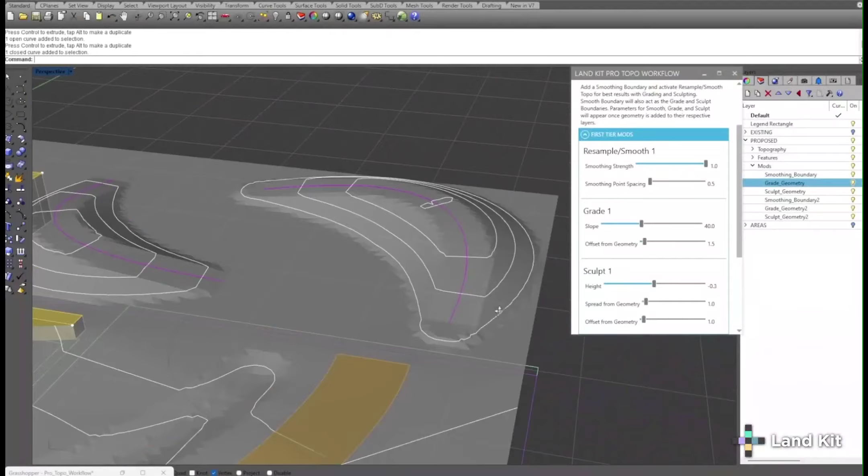It's just magical. Welcome to Kit Crashing, where we explore landscape architecture tools like 3D, parametric design, and AI.

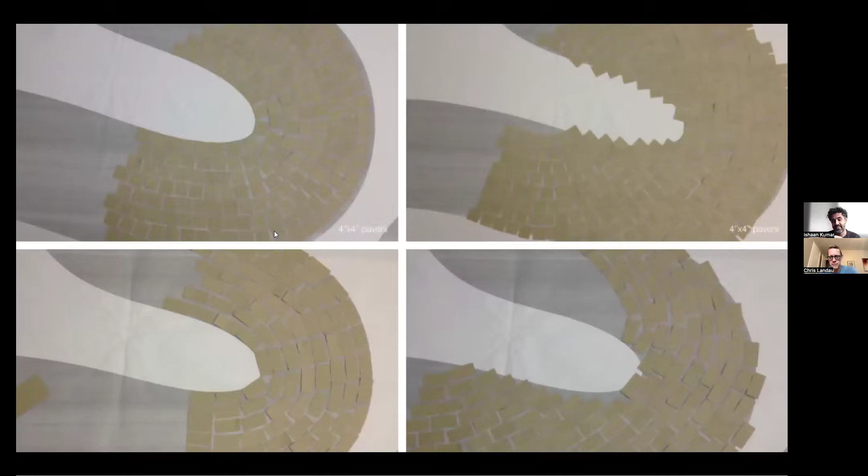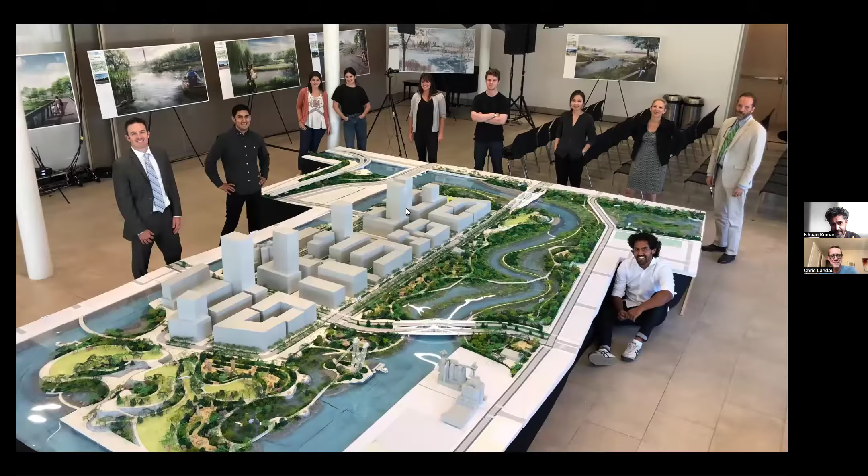iterated through models. This is another thing that I wanted to touch on: MVVA is a very physical model firm. They test out with plan, but they invest a lot of time in studying these things in large scale physical models. I actually worked at MVVA for 2 years coming out of Penn. And for one of the public meetings in Toronto on the Portlands project, we built this massive model across the whole summer. These are 30 by 40 foam core boards. I don't remember how many there were, but we worked an entire summer on them.

Another point that I wanted to talk about is just the different ways of working. MVVA is very big on the physical model, and here we're talking about the digital model. I just wanted to get your thoughts on that duality and your experience, because you're also a sculptor, from what I understand, an artist. Yeah, I have an art background and originally thought I was going to go into sculpture, and started realizing there were all these different things I could do.

I got into 3D modeling, but I did a lot of physical models when I was at Olin. I would spearhead building models. We did some really fun models and some really difficult models, like the Metropolitan Museum of Art Plaza, where we hired a really serious fabricator to work on it. It's amazing what a model can do and communicate to a client.

And for a design team, if it's a working model, LandKit definitely has that spirit. It is a digital model, but in a space like Revit everything is so constrained technically. There's always going to be technical limitations within a digital space, but being able to be fluid and iterative, to have some of the advantages of a physical model by building it as a 3D model and looking at it from different angles, but not treating it as so precious.

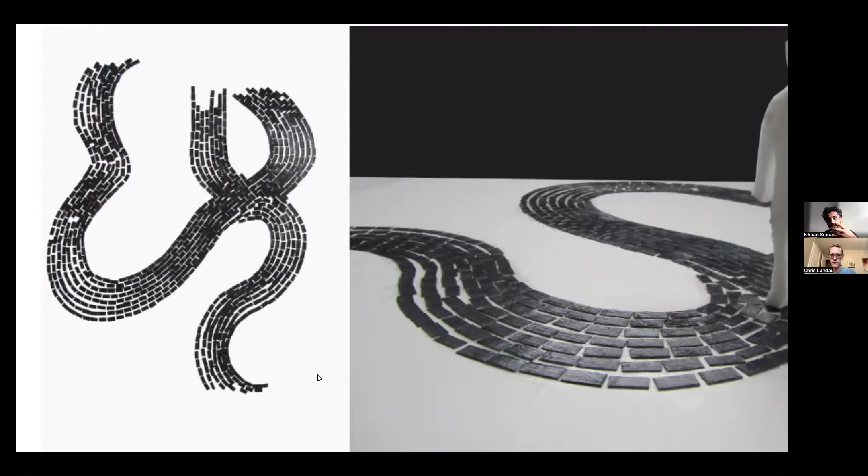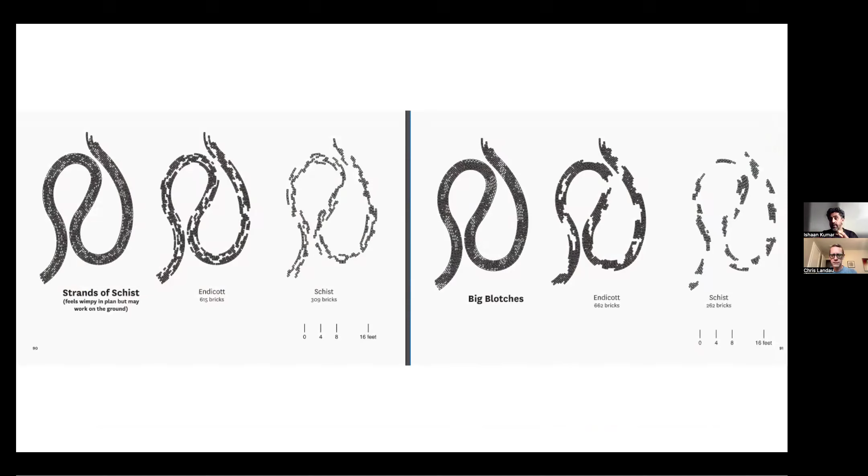There's actually a story in the book about a summer intern that took this tapestry that was in the Isabella Stewart Gardner Museum and pulled it out, and this became an inspiration because initially it was just one unit and they had tested the scale, which we could do in LandKit. You could iterate whether it's a running bond or a herringbone pattern, but that led the team to think about this dual tone and how we could recreate that using LandKit. But the process was to take this idea and mock it up on site.

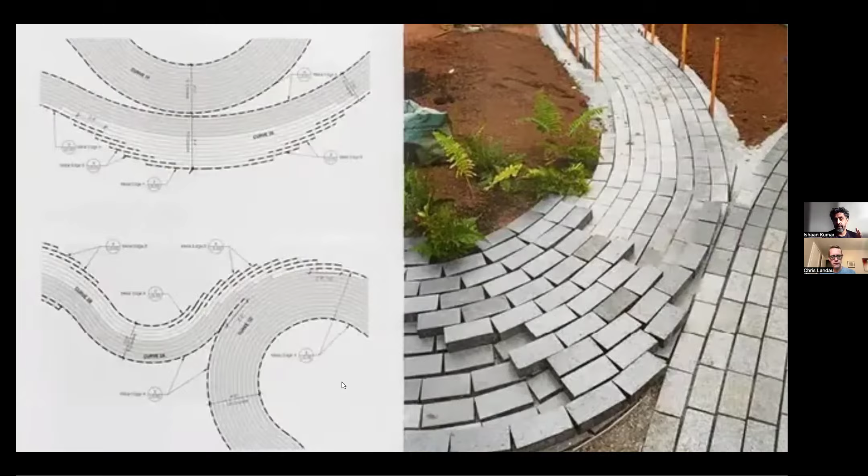Again, going back to the time and budget on this stuff, they would mock up the condition, which then informed the CD set and the final product, which no one can deny is exquisite, but there is a lot of technicality and resolution in this project. And I just want to take a second to explain some stuff that I've learned working over there.

There's curve one, curve two. Each one of these is precise with a point of reverse curvature. All of these then get put on a table with the dimension of every single curve. The curve has a center line, which varies from 4 feet to 8 feet to 2 foot 8. Somewhere over here it gets really tight and then it flares out. There's a lot of dynamism in that walking path that they achieve. Sometimes the curves just touch. And it was a very laborious process.

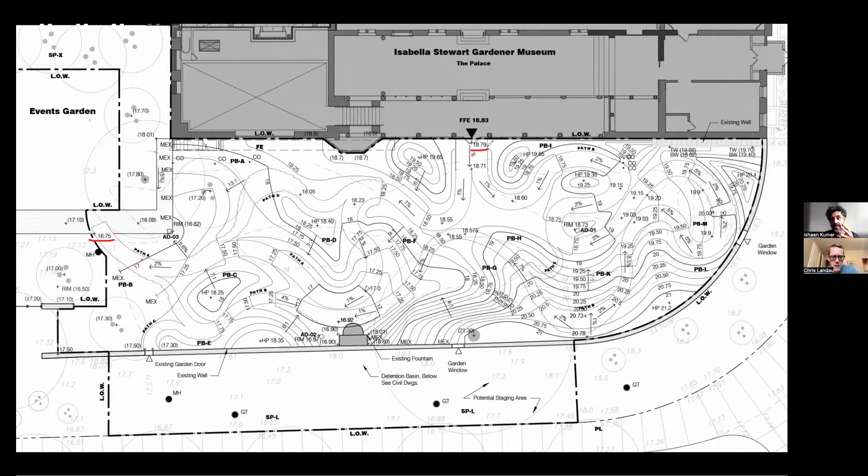And what I didn't know is that it's actually really complex grading-wise too. I thought it was flat. But actually, you come in at 16.75, and the entrance is at 18.75. So it's 2 feet higher, which if we were to take an ADA slope, we need 40 feet of run. And the thing is 50 feet wide. So not only did they achieve that, they did a bunch of operations.

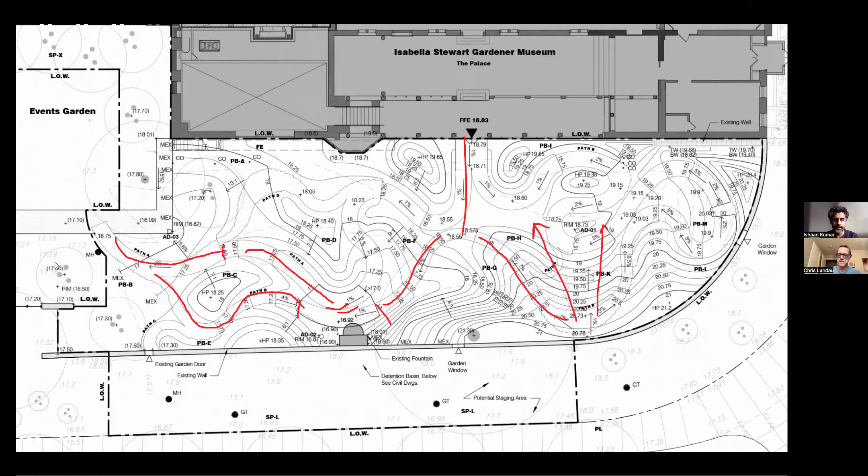Here they came up to 17.5 to go back down to meet this path that went up to come down to flatten out to this point where they touch. Then they go back up to 18, so they're at the elevation of the entryway. And then they go up even higher and have this vantage point at 20, and then you circle back down. And so there's just so much artistry in this project. Dios mío.

I have nothing to say. It's just magical, whimsical, and where I would start, just based on what I know of LandKit, is this center line.

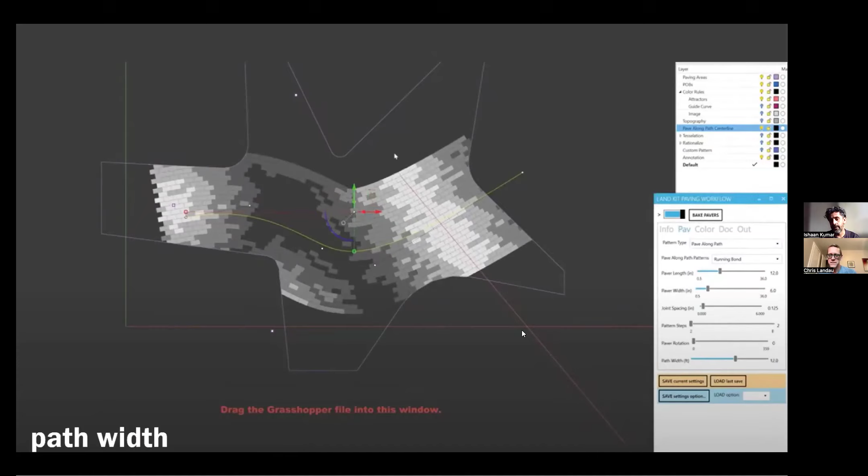Playing with that center line, the pave along path, which the workflow gives you the ability to play with the path width. This is something that Ben covers in our onboarding workshops. But last year you released the 2.1 update and you gave the flexibility to start introducing custom slopes, because nothing is designed with the one slope meets all criteria.

Yeah. And then in terms of this snake-like skin, I was thinking that maybe you could use these attractors to get that idea, but that's where I would start. And then the whole grading of this project is just another beast of its own. But we're here to see you work your magic, and I sent you the two screenshots of the paving and grading file. So maybe before we even jump into Rhino, what would your process be?

Oh my goodness. Well, I think probably the biggest place to start is the paving. It's two-dimensional. It's complicated as it is with these curves, and that's the thing where I'm like, how does this come together? I like to attack the hardest thing first, because if I fail at it, I can fall back to other things, let my brain work on it, and then come back to it. Hopefully that's not what happens.

We'll see. Maybe I'll nail it. Maybe I won't. That's part of why we call it kit crashing. But I think, yeah,

I know I say we need to design in 3D, but a paving pattern is very much a 2D thing, a two-dimensional system in many ways, and so we start there. We should define that plan, and in my case, we're going to just start with what they've designed. We're not going to start from the beginning of their process. We're just going to show how you could create something like this, and then probably show how we could tweak things, right? How could we modify those things? So that's probably how I'll start out.

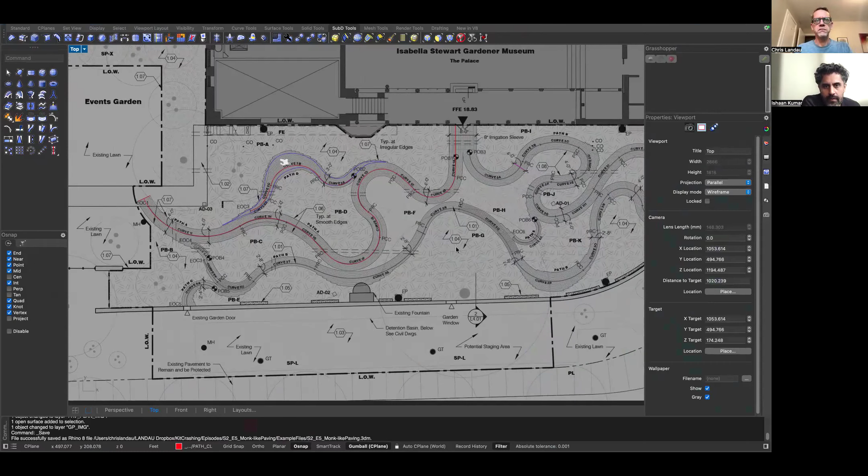So, unlike some of our other episodes, I started a little bit of setup. I just grabbed an image from online, and you sent me a little bit better image. And what I started doing was just drawing. I know I'm not drafting these perfectly, but this is the phase where we want to be able to move things really fluidly, and drafting exact poly arcs is antithetical to that. It's not important right now. So we have the main parts here. We've taken an image, brought it in relatively to scale in this case.

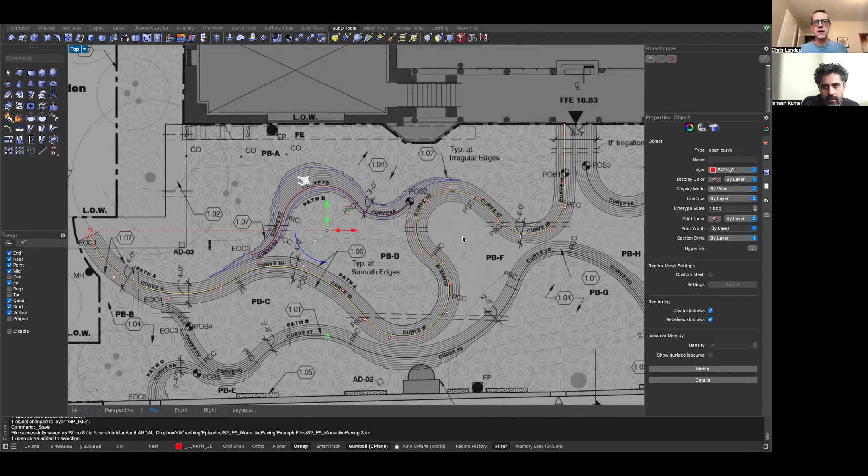We have a layer with some center line curves, and I'm still trying to wrap my head around how we're going to do this. I have this boundary curve that's going to limit where the pavers go. And I have to think through that a little bit. But I had another idea about how to do that, so I might just delete that. We'll see. So if I, hmm, I'm just trying to think.

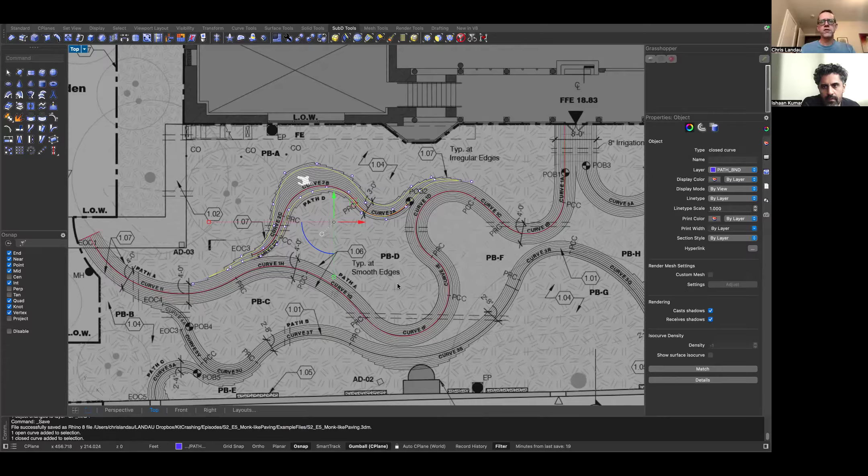It's tricky because we have two classes of path here. This path has a constant width throughout the whole path, as far as I can see. It's a center line. It's not changing in width, but honestly, it's the exception to the rule. All of the other paths are changing. So I think what we need is a boundary for every single path, this one included, even though it seems redundant. I know we could create a path procedurally with that one, but probably every single one of these is going to want a boundary.

So I'm actually going to delete this boundary, and there's a reason. But let's start here. I'm drawing on the pave path CL layer. So we'll go over to Grasshopper, and actually, I'm going to drag my Grasshopper file in so I've got the naming all right. I'm not going to use Elefront. This is kind of an old template. Delete that and delete these. Okay, hit save, save as the new Grasshopper. So we're going to do a layer called pave path CL, and then we'll do layer pipeline.

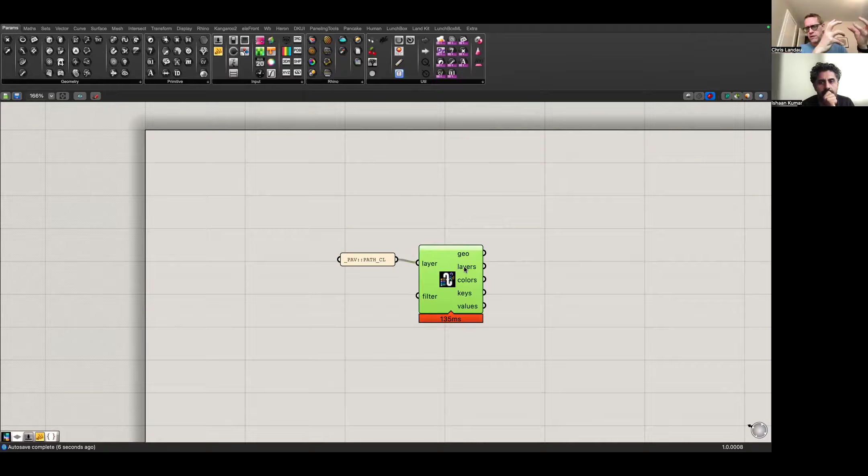We do a lot of this because I like to do this, because it brings stuff directly in from Rhino, and then that way we can work with these geometries in Rhino and they come in automatically. So asterisk was when we want everything under that heading, label, right? Okay. You want a wild card for, say, something like areas. If you're bringing in all the different areas underneath a parent layer, you'd use the asterisk as the wild card to say anything past this that has any other naming or any other text. So you can see that it's green because it's selected.

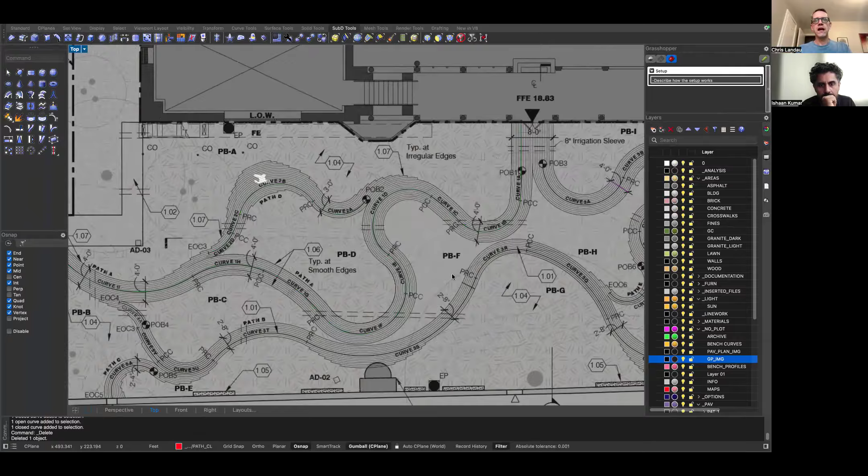And just so that we're not going back and forth like crazy people, I'm gonna combine these two windows. And then it automatically brings in all geometry, and we're only going to draw curves on this layer, but you can filter it and say just curves. So we can filter and say I only want curves. And then we're going to do pave, or sorry, path, add path pattern. So it wants one of two things. It wants either an area or a path.

So this is kind of a neat thing. If we're going to build paths like you were showing with grading, which we may need to do down the line, we may want to build this with paths and not with areas, which is kind of interesting. The only problem here is that we need it to have a custom outline, right? So we may need to separate that. If you just have a straight path going up a hill and you want to pave it, you can use the same path to pave as you are to grade, which is kind of cool. So the path kind of works for both.

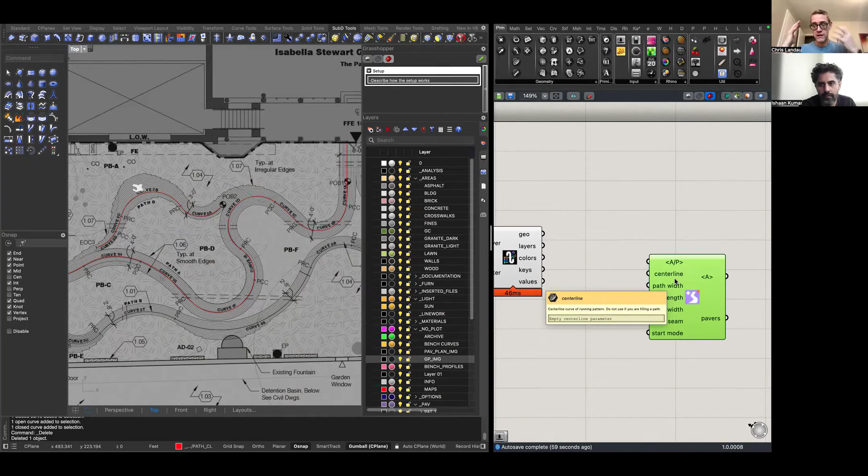But in this case, I think what we want is an area that defines a certain zone and then a center line that defines the center line. So we'll start with the center lines first. And I think it's not happy because we haven't given it boundaries. So the next thing would be to give it boundaries. So the way I'm going to do this is I know that this is a 4-foot path. I'm going to offset this 2 feet.

Could you script that though? I could if all the paths were the same, but they're not. We need these custom boundaries, and that's what I was talking about before. I'll actually delete this. I'll draw a line here. So we need custom boundaries for each one. The only one that seems like, oh, you could script that, is this one, which is okay. Like one of the simplest things you can do with,

Grasshopper is taking geometries and making simple transformations. Like, okay, I'm going to offset it this way, offset it that way, and then all those are going to get lofted. Mathematical, right. If you have multiple curves, then it gets a little bit more complicated because you have to think about the data structure. But in this case, we're going to focus on custom shapes for each center line. I see. Okay. Yeah.

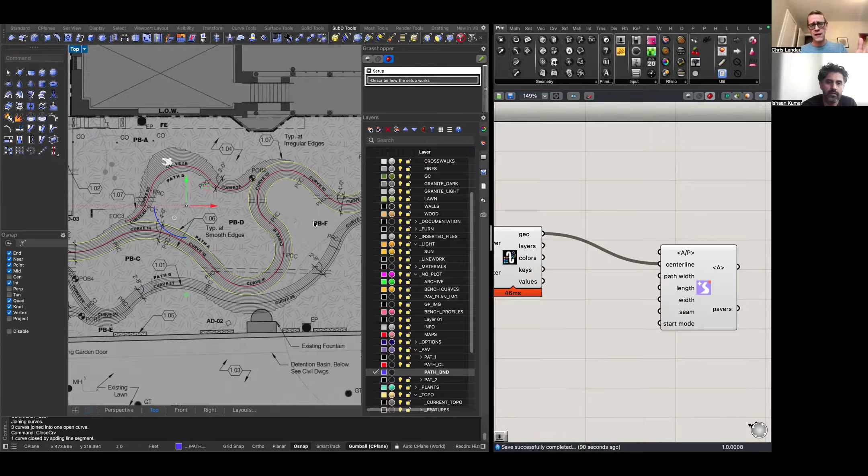And there's another thing that we're going to do, which is we're going to have to pair the boundaries with the center lines, which is a little tricky, right? Like, how do you do that? How do you make sure everything is set properly? So I'm going to grab this. I've drawn three curves. I'm going to say join, and then I'm going to say close curve, and that's a fast way to kind of get a closed boundary. Opposite end. Nice. Yeah, it's great to know how to do that for people who don't. But we're only doing it once for these paths.

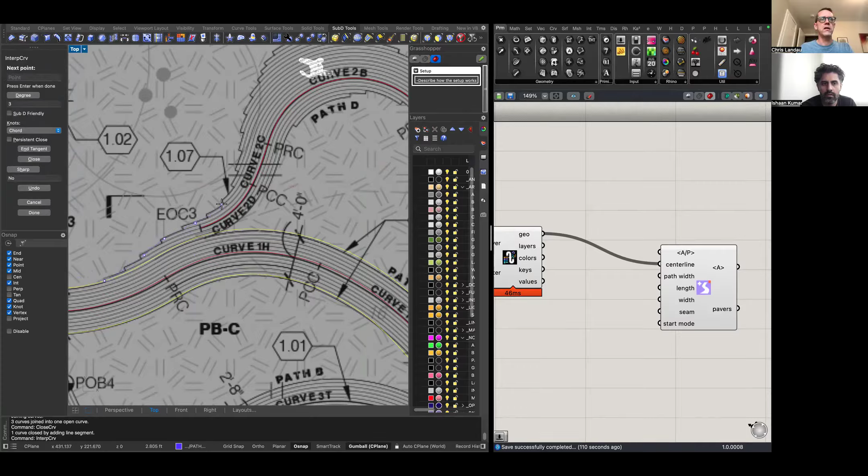So then the next thing I'm going to do, originally I thought I needed to offset this, but I have an idea. So I'm going to say interpolated curve, and I'm going to draw this right exactly along this edge, I believe. And I don't know, I'm gonna have to explore this a little bit, but for conceptual purposes, this is a great way to prototype the idea, right?

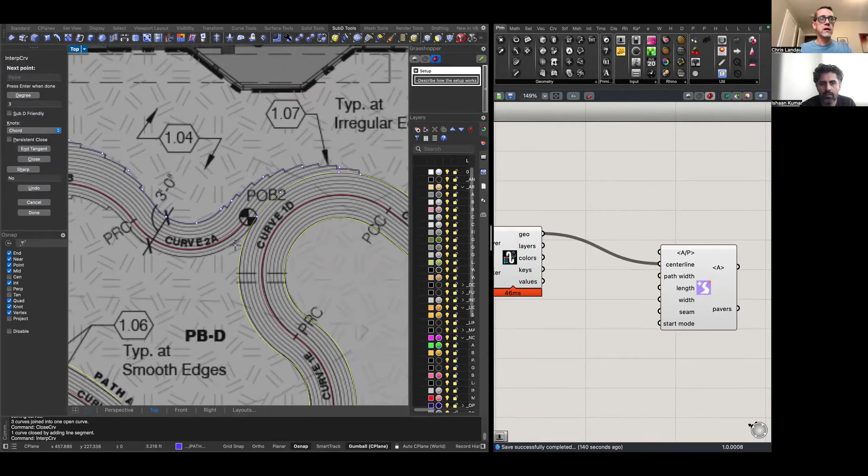Even if this doesn't reflect their construction documentation perfectly, this is going to give us a pretty good representation of the design idea. So we come around the corner here and we begin to taper down. And we can always adjust this curve as well. So then I'll follow this tightly and plug that in.

Okay. So now we have at least two boundaries, which is the main thing for setting up our Grasshopper, really just to have two boundaries. So I'll do another copy, and I like to arrange the data so the wires don't cross. It's like Ghostbusters. So then I'll do paving, and in this case it's called

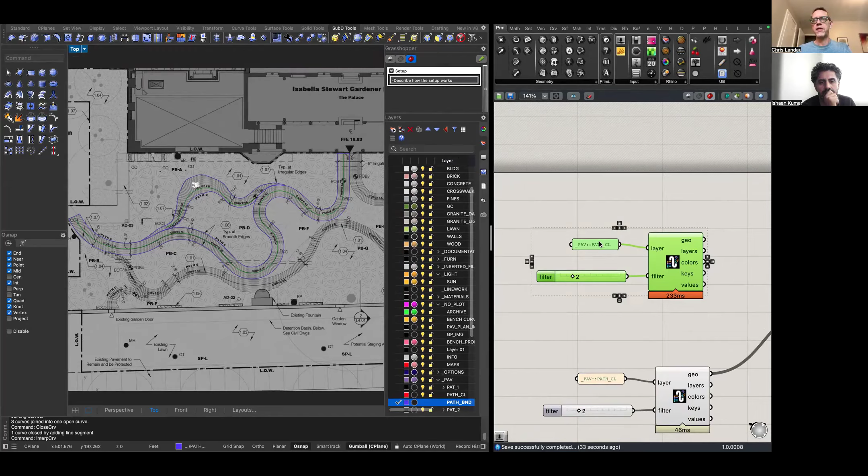Hang on, I got to get out of here to expand. It's called... a lot of layers. It's under paving bound or path bound. We're going to say path bound, and we have our boundaries, and there's two curves here.

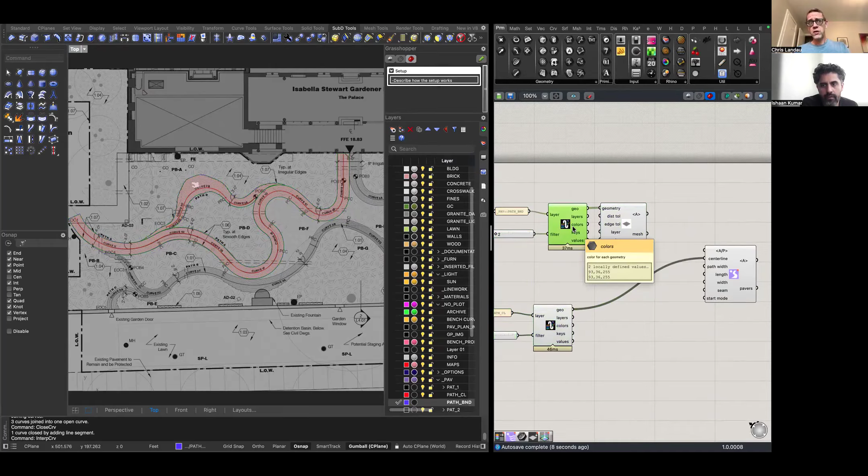So what I will do is create an area from each of these. That's what we need. But we don't know if the order of these geometries is the same as these. And we could keep going in and selecting them in order. That's one way to do it. It's kind of fussy if you don't know how to set up something in Grasshopper to solve that.

But I like to set up things that have a little bit of resiliency to them so that they automatically fall into place. Or automagically, right? So what we're going to do is say, give me the middle point along each curve. And then we're going to say, is the point in a curve? So we'll graft this data.

And grafting just means if I have a list of data, just a list of separate items, when I hover over this, I can see this list. When I graft it, each item becomes its own list, or a branch on that list. So then plug that into there, and I'll plug this into here. So P is point and C is the curve.

And I didn't graft it. I explained grafting and I didn't graft it. So we plug that in, and now that's grafted. So it shows that these are two lists with their own addresses, 000 and 001, those are the addresses. And then what we get are two branches of results saying whether or not the point appears in all of the curves.

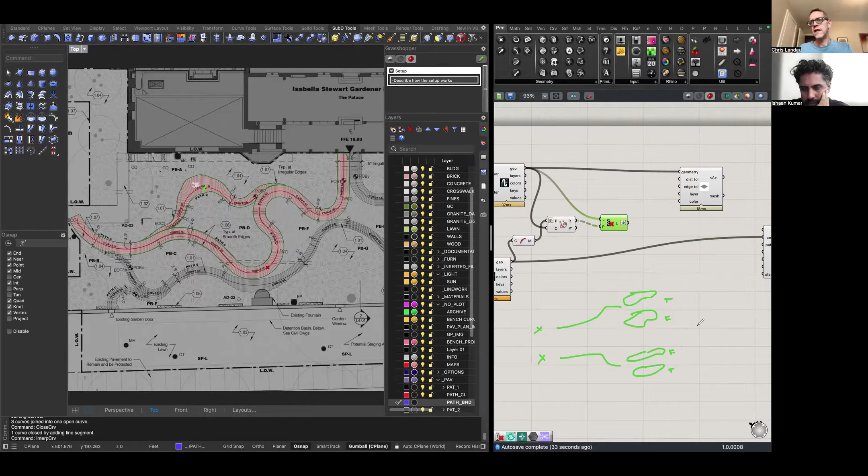So I have this point and this point, from the center line of the boundary. So these points, right? And then I test against this boundary, and then I do it again here and here. And this says, oh, it's in here, but not here. And this one says, it's not here, but it's here. Then I say, okay, zap anything that's not in, and then flatten it.

But in order to zap it, I need to say, give me the list of those, give me the true false and zap them. You use cull, it's cull by a pattern. So it's removing stuff that we don't want. And once we do that, we now have this guy and this guy, but then we need to flatten those back down so that they match the point list, right?

So now we have the boundaries that match the points. Then that should work. And then we can plug this into here. And now we have areas. And we have paving. Houston, we have paving.

Amazing. So what we want to do is look at the width of the paving. The width right now is crazy, it's 1 foot, and it looks like it's going to be 4 inches. There's a couple ways we can do that. Because these are in inches, I'm going to create a divide by 12 expression on the input.

You can do grafting here on the input. I'm going to modify what that input is and say that the width is x. It always does x divided by 12, and that turns feet into inches. Is that right? Yeah, sorry, inches into feet turns the 4 inch into a foot value.

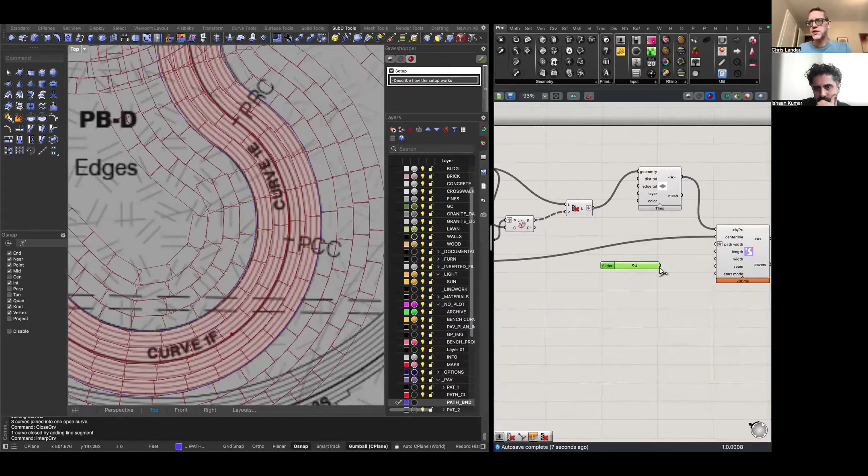So now, oh, that's path width. I want paver width. So we do x divided by 12. And the length as well. Yeah, and this is wrong. First of all, we don't want this expression, because that is going to be a number in feet.

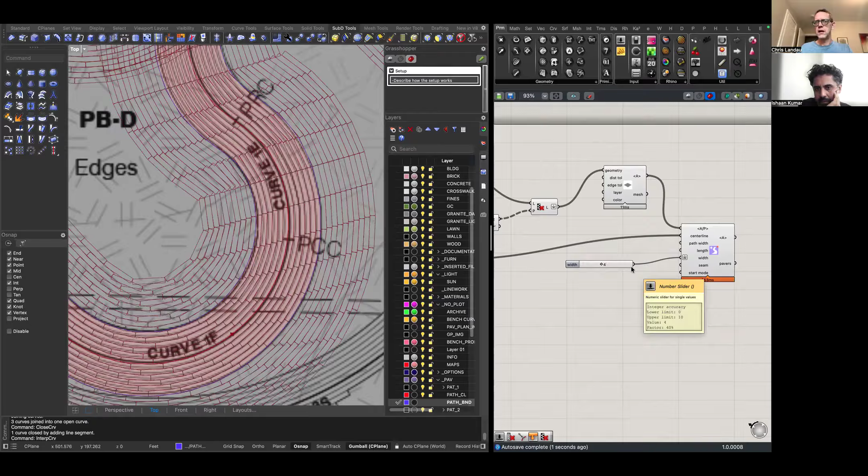Yeah, and then in order to, sorry, commit, there we go. In order to remove this, we hold the command or control key down and we just replug it and it unplugs that. Now our path width, we know that the width is 4 feet in this case. This is going to be an issue here, and we're going to address that.

Why isn't the boundary supposed to be the edge? I'll show you that in a minute.

So if we say, for the length as well, we need x divided by 12. And our length looks like, maybe it's 8 inches, right? As I go along, I like to hit save.

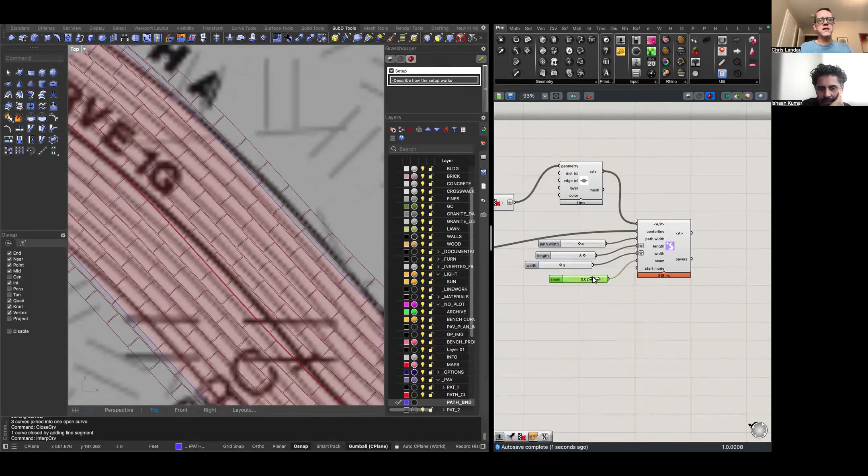So that's good, and then there's probably some kind of spacing between them as well. I'm just going to do 0.01, which is in feet, which you would never draw in CAD, but I love this already. And then we can just adjust that dynamically. You could do the expression on that as well to be x divided by 12 and do an inch value.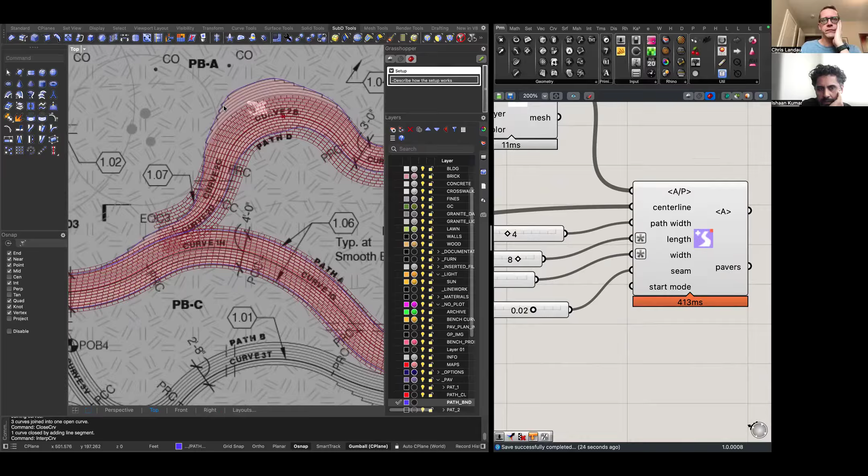So let me look at what your question was regarding the boundary. So why is it not adjusting according to the boundary, right? And part of that has to do with the fact that we are giving it an exact paver or path width. The path has a width, and different paths are going to have different widths, we know that. That's going to have to adjust.

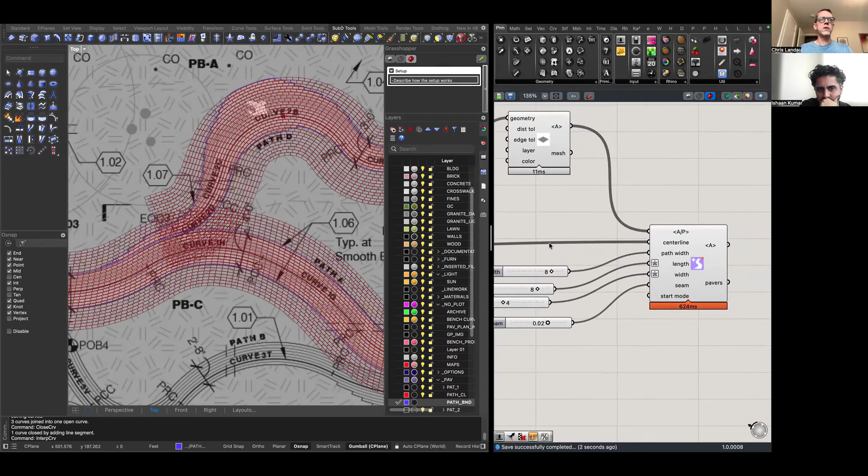So we may need to do our custom parameters possibly. Or we could say, just make it bigger, and then we'll remove pavers from that boundary.

So what we want to do is, there's a few ways to deal with this. One is to trim, right? So we could say pavers and just trim them. And it's trimming a lot of pavers, so it's kind of a slowish operation. Now we have pavers that are getting trimmed along those boundaries.

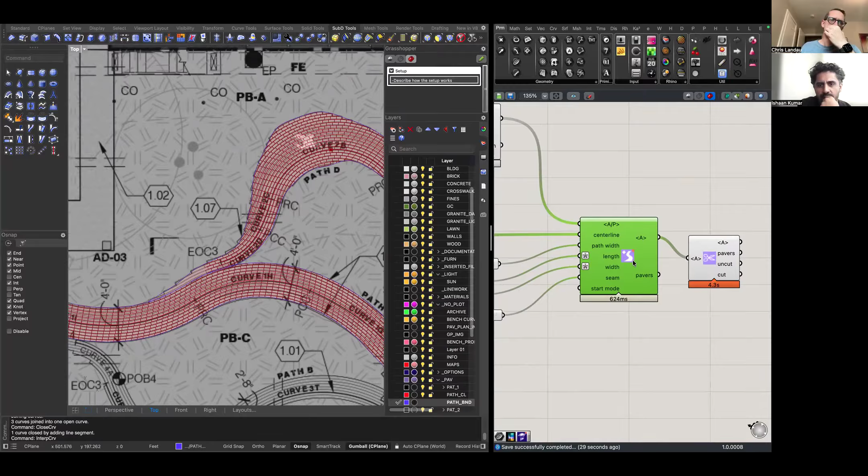It's a little hard to see. The trim works, it knows based on the relationship in the script that it's tied to the boundary. No, it's based on the center line. No, it's based on the boundary. It finds and trims using the boundary to trim.

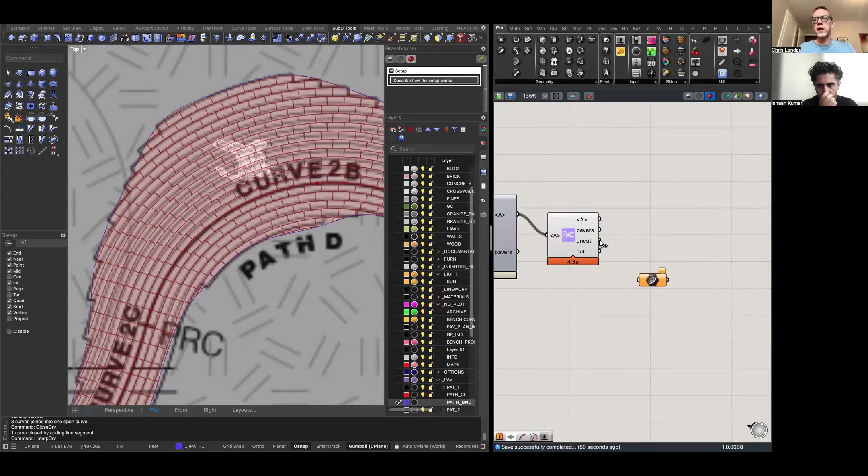But what we're going to do as a trick, as a hack, is we're going to plug in the uncut pavers, and then we'll hide this. And now, it's hard to see, so we're going to do a mesh just so we can see these and hide this other stuff. There's a lot of stuff going on here. And then we will plug this into maybe some kind of a preview bake plus.

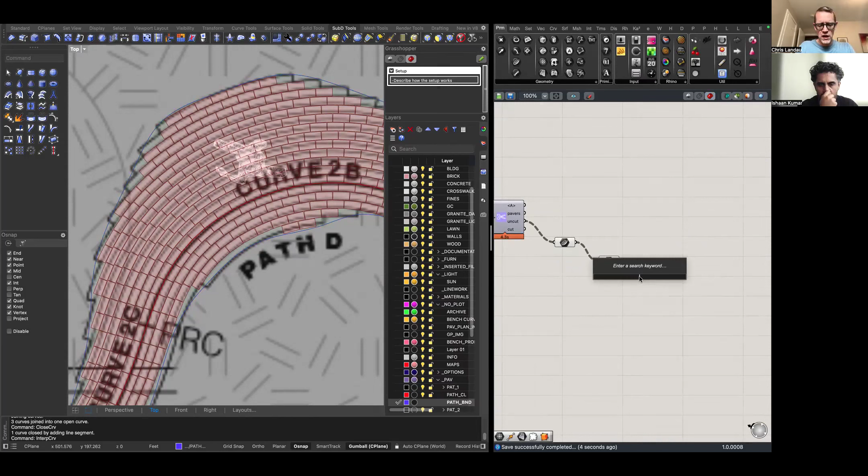And then we will make this, that's close enough for now. So now you can see it's getting much closer to what we need, right? It's only including pavers that are not trimmed. There's definitely some issues with our width, right?

So if you have a 4 inch wide paver with a gap, and then you have a width of the path which only accounts for four feet, it's not really going to fit, right? This is the kind of thing that typically you wouldn't discover until you're in the field, with the contractor like this doesn't make sense. That's why you do those tests.

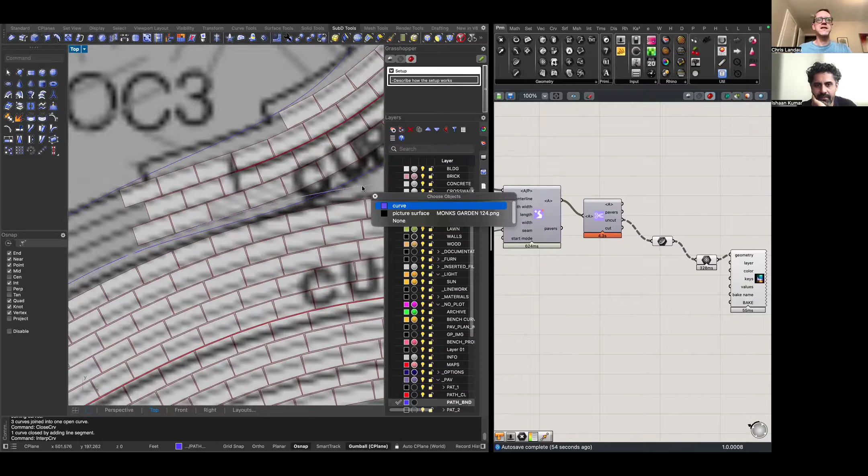But in our case, what we could do is just say we should have made this offset bigger, and we can actually just do that. We can say okay, my seam is going to be 0.02. We can say offset... let's just say 0.08, because of the gap.

And then I'll delete this old one. It's probably not going to be happy. It's going to have to retrim. But yeah, that should do it.

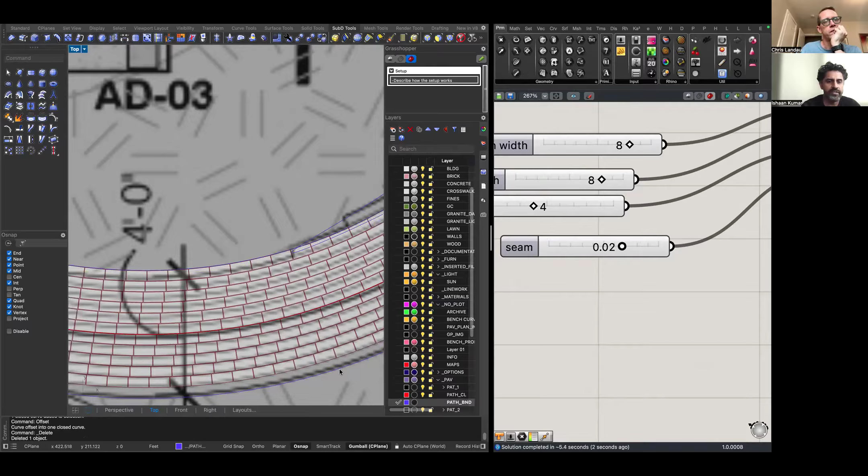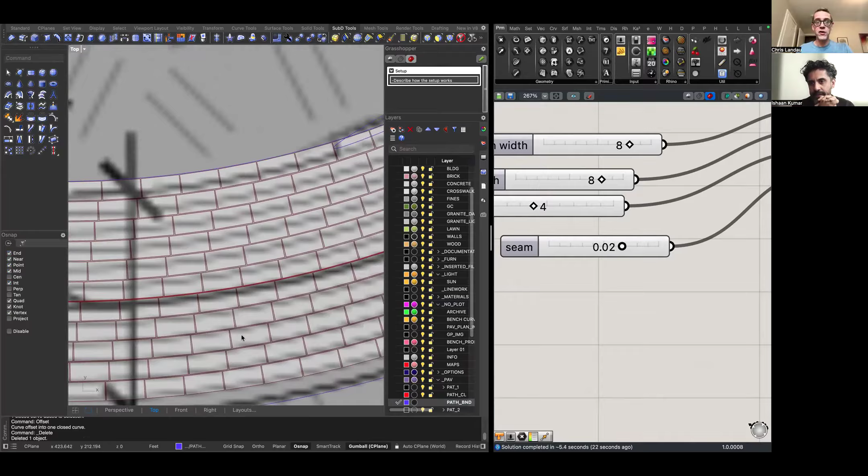While we wait, what I was getting at is the trim component in Grasshopper doesn't need the boundary curve - it recognizes it from the step behind. You put in the trim component and you didn't plug in the boundary, because the boundary's already inherent in there. It takes the logic, it says whatever the boundary was, use that. So one less wire.

So we're already kind of starting to get there. I can extend this out to here. I know this is not following the curve properly, but we can begin to see that - just as a conceptual thing, this is probably a little undesirable in terms of the process, I would say.

There's also something about the way - I'm just noticing, did I draw 2 points? I think I drew two points. That's funny.

And just flagging that we're dealing with a lot of geometry here that's being drawn and modeled, which is why it's starting to slow down and bog. But it gives you the pros of visualizing this in real time and controlling the gap, iterating the curve. It has its pros, obviously.

So one of the things you'll see, if we look here at the preview - can you see how it's simplifying that curve a little bit? See how the green doesn't quite meet the purple curve? That's because when you create a mesh, you can set your own tolerances. So we have a distance tolerance of 0.01 feet and an edge tolerance of 5 feet. If we wanted to tighten that up, we could do 2 feet.

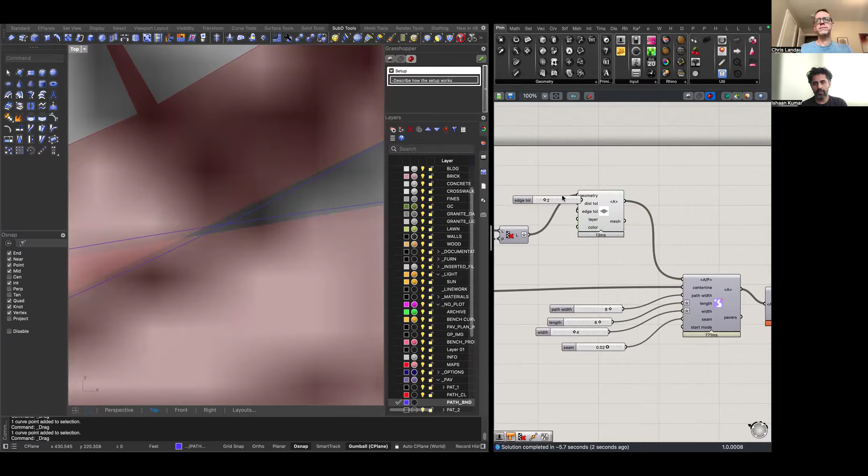And it's just going to be a lot tighter, and it might actually - so what was happening is that shift seemed to be cutting off some of those pavers. That's interesting, it's still doing it. We may just want to offset this a little bit more.

Because you don't want to make this too detailed, then it can start to be a little bit heavy. We don't want it to be too heavy - it's this kind of back and forth. You want to be able to iterate and all of that fun stuff. So let's take that curve - we're still on the path boundary. We'll offset it, offset another point.

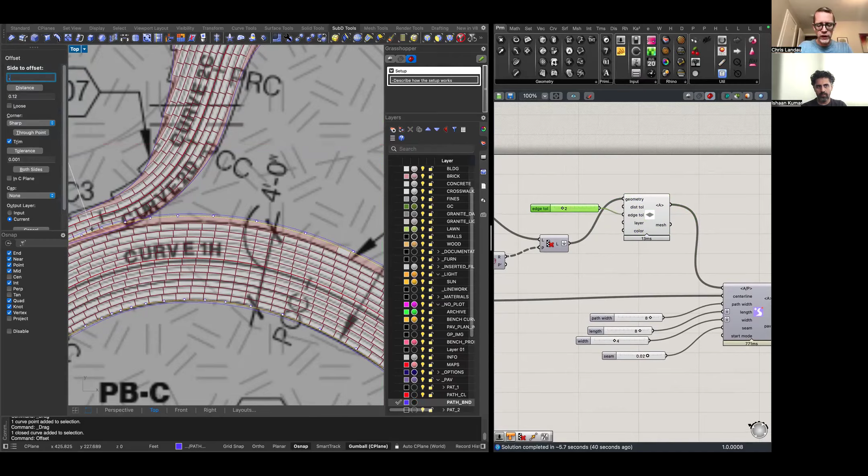An inch, 0.04 or something like that. We have to click to offset it, and then we can delete the old curve. The way it's working, it's processing both changes - once we make the offset, because it's in the layer pipeline, it pulls that in, and then when we delete it, it processes again. That's why the wheel is spinning there.

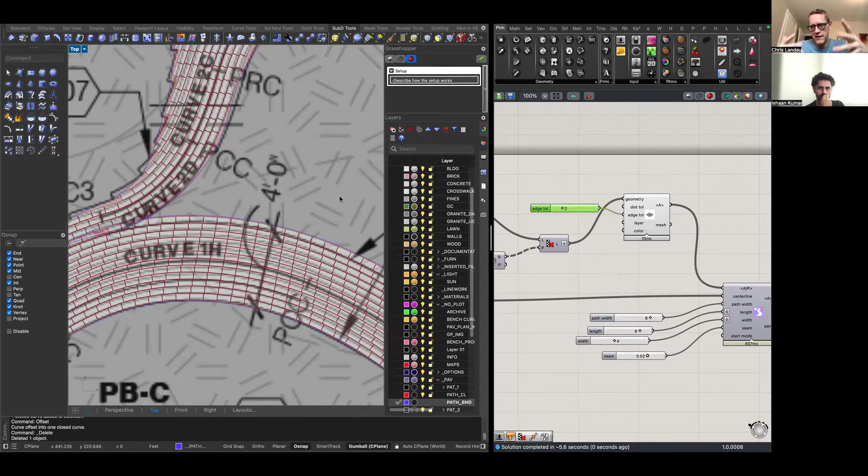But you can see that we have a pretty great approach to this in terms of how we can begin to iterate. We can take this and say, take all these points and maybe we're moving those - maybe we have a sketch that the boss drew and we're just trying to match the sketch, right? We're trying to get it as close to what the boss said as possible, and we'll move that curve up and it starts to fill in those gaps that we're missing.

We grab this and say, yeah, this is actually a lot of points, and the reason it does that is from the offset. So what we could do is say simplify curve, and sometimes that will do it. It doesn't seem to be doing it in this case, but what we can do is just fix little things like that if we needed to. I don't know if that's going to do it... yeah, it did it. In this case, it did it nicely.

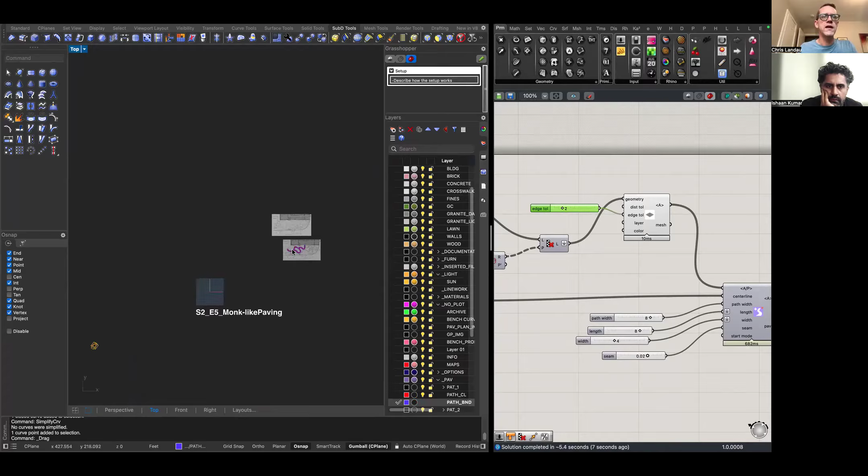So pretty good - maybe, if we look at this, it's not construction doc level, but we did this in 20 minutes.

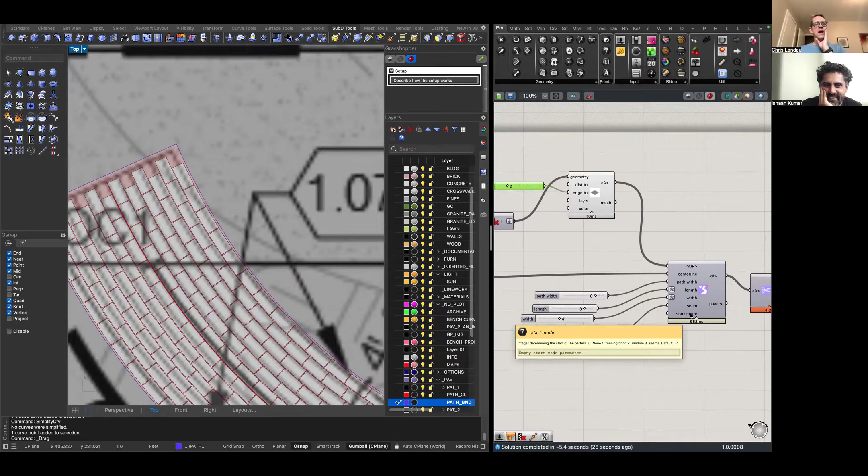The other thing to look at here is the way that the pattern starts - this is just a little side thing. There's a start mode, so it starts with a running bond. Ironically, once we get to here, you see everything is sort of stacked up and aligned, right? And that might be undesirable, and in some cases unavoidable - it's just, when you're shifting the width, it's going to change, and things are going to line up.

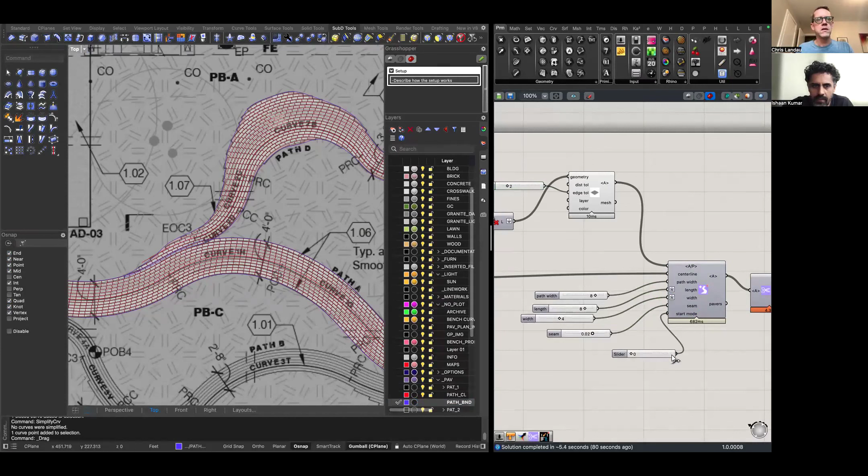For these start modes, you can do none - what is none? I forget what none is. Why would there be none? Running bond, random, and seams - oh, these are modes. So random, let me see. So none, let's just try it. Zero is... oh, none means it starts with no running bond - it's like everything is lined up perfectly.

Aligned, yeah, okay. And then we saw running bond, and then the next one is random. So we start there, and you can see that what it will do is randomize the starting positions of each row. And that might, in the grand scheme of things, even though certain things line up a little bit more, not be like this thing where you're like, why are all of those lined up? It's conspicuous, right, and when you're doing this visual design, sometimes you don't want that.

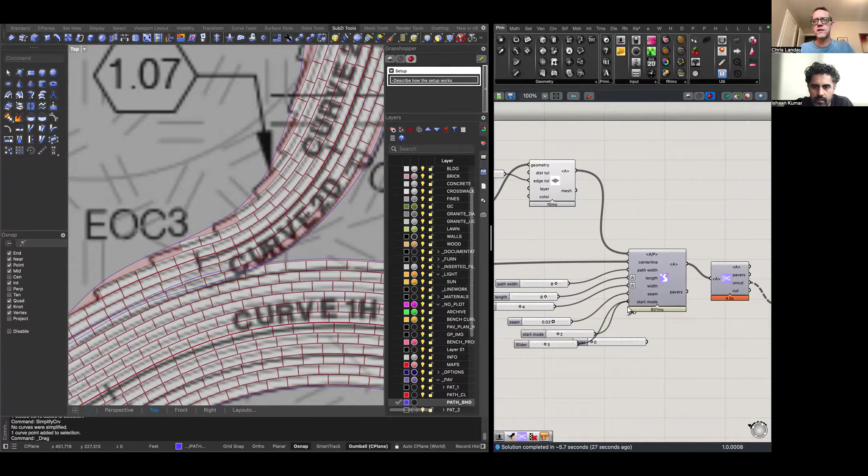That's really important. And then the other mode, since we're here and doing it, is three, which does kind of a... what is it doing? Seams, I forget. I feel like seams needs a path, and seams will actually turn it into kind of like a boardwalk - like an edging condition almost. So let's just call it quits on this little element here.

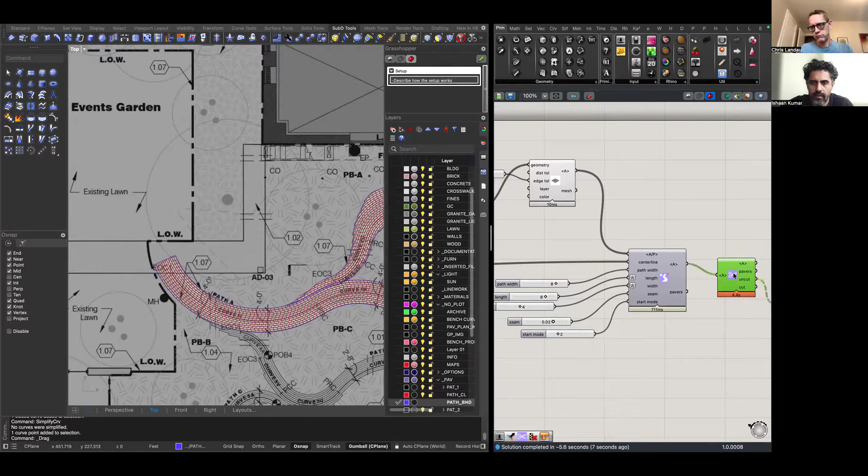Two is running bond, right? Yeah. And so you can see that we have an expensive component in terms of processing. The way that I noticed that is I'm using what's called the profiler, with the name expensive component - 4.4 seconds is expensive. And I don't mean like the cost of the software, no, no - I mean time, time is valuable.

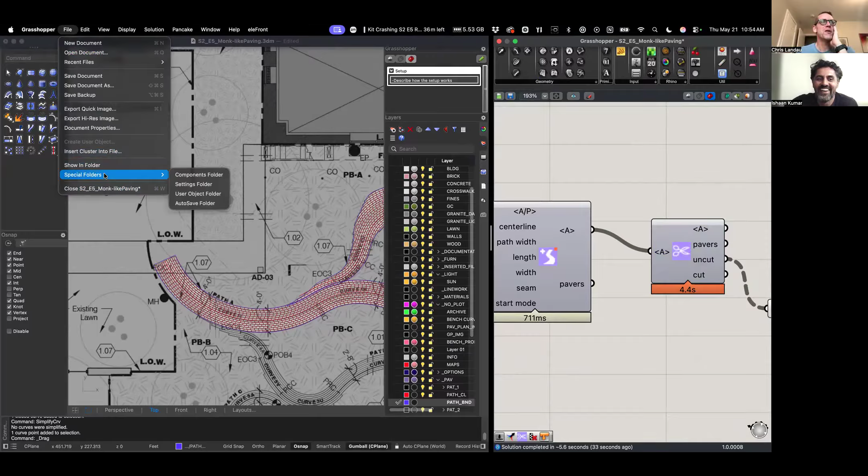So if you go to the settings - you got to be in Grasshopper - you go to the settings and say Grasshopper settings, and there's all kinds of different stuff. Some of these are actually Pancake, that's like a plugin. But under widgets, you can go down and say turn on the profiler widget, and what it does is it shows you how fast each component is running. It gives you a little color indication too, which is really nice. This is for anybody who's doing serious computational design.

This is really important because you start to see what takes a really long time, what geometric operations take a long time, like maybe where a problem is occurring because you've grafted where you should have flattened data or something like that. Yeah, and so you can see that you're multiplying.

But this is where, not to derail the conversation, but this is where the value proposition of LandKit is really in your face. It's like 711 milliseconds to create all of that, or 4 seconds, versus how long it would take to draw this, and your boss comes back and is like, I want this arc to be tighter, and you're arraying a rectangle. Yeah.

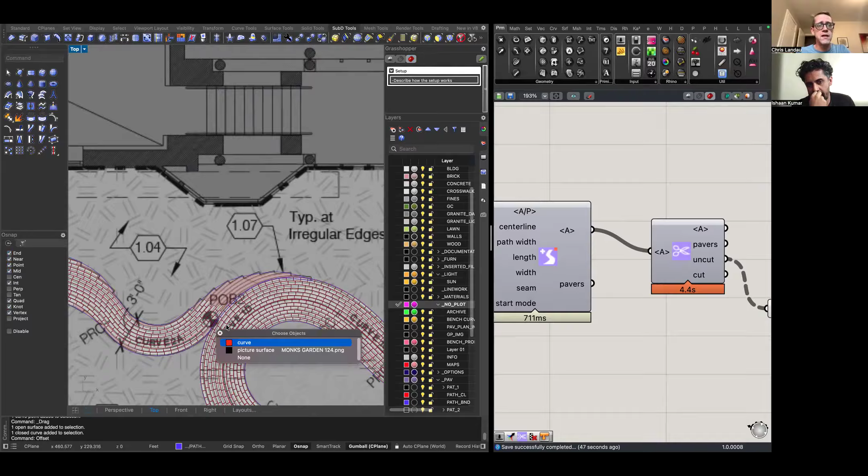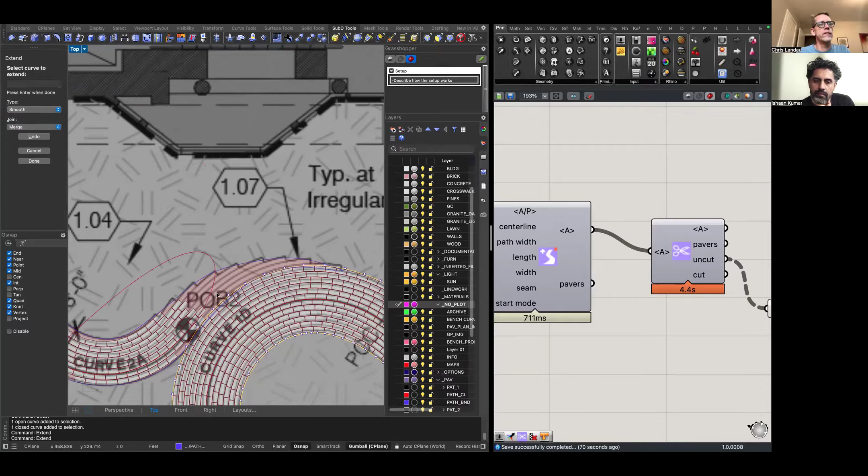Sorry, I'm just setting up this last curve. Anyway, so I can extend this curve, and maybe that's what I'll do. I'll say use this as a boundary, extend it, and do an arc. So arc is the type that I'm using. So then when I click on this, oh, it's going to follow it. Let me see if there's a different way to do this. Smooth. I thought there was a way to do this where you could actually determine how to do that.

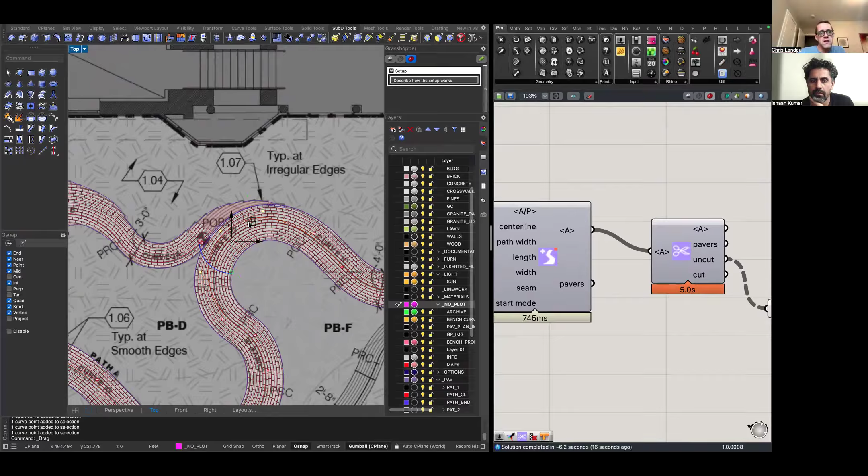But this brings up a different interesting point. If you can see what just happened there, I'm going to undo that. But some of those early studies you showed me, of how they were looking at the pattern and how it landed on the path, we could just as easily say, what if we did this thing where the pattern kind of falls off of the path, and so it begins to turn in a different way, and we get this kind of thing. And who knows, maybe they would have done something more freewheeling, with things going in and out, if they had a tool like this, right?

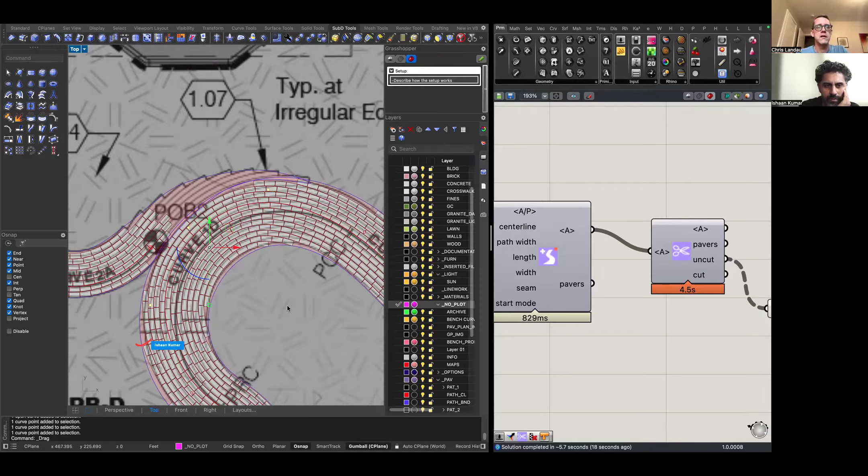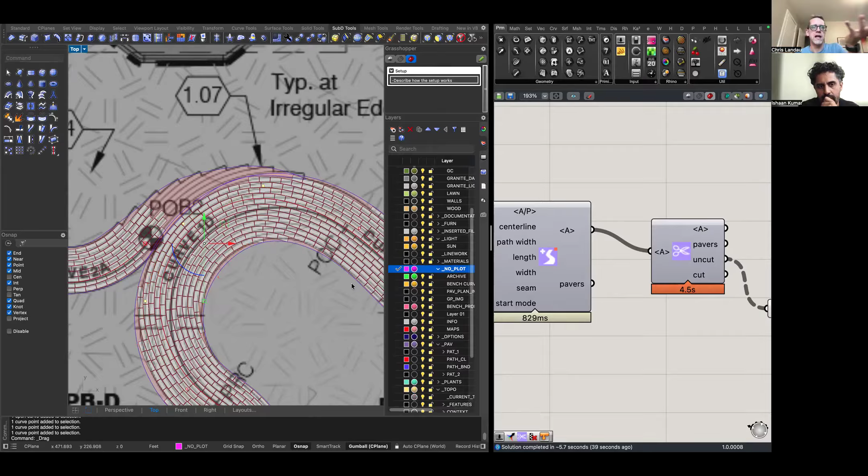Yeah, because it starts to give you that jagged edge that they ended up doing. A lot of times the decisions we make about these things have to do with constructability, but they also have to do with what can our team do in the time that we have? What's possible to document? And if the tool is literally helping you draw this thing...

We don't have to do this, but the theory is there. We could play with that boundary and move it like you did, and you would get that jagged edge here. So it's just a lot faster, because I would always think of it as the center line, but what you just did there gave us the effect that they wanted to study and iterate, which was how far does it start to peel. Those are the most beautiful moments of the project, I think, when it flares out and the edge dissipates and it's not a clean offset, this condition right here. So you just showed me a really fast way to iterate that.

So I'm going to show you something even faster here. This is all about speed. So you can see this takes 4 seconds. Every time I do something in the file, I wait 4 seconds. Doesn't seem like a long time, but when you're working and you're in the flow, it's really hard because you want to be able to edit a lot of things. So if I just lock the solver, I can then say, all right, let's draw an arc. Oops. Make sure you're in Rhino.

Let's draw an arc, and I'm going to do T for tangent, and then I'll go off of the end of this and all the way over to the end of here, and then pick that third point. I don't know where it is exactly, and then I click there, and this is not quite right. Circle TTR, I think I would use. I think that's a CAD command, isn't it? Circle TTR. I just have to look and see which curve we're on. I think it's this one.

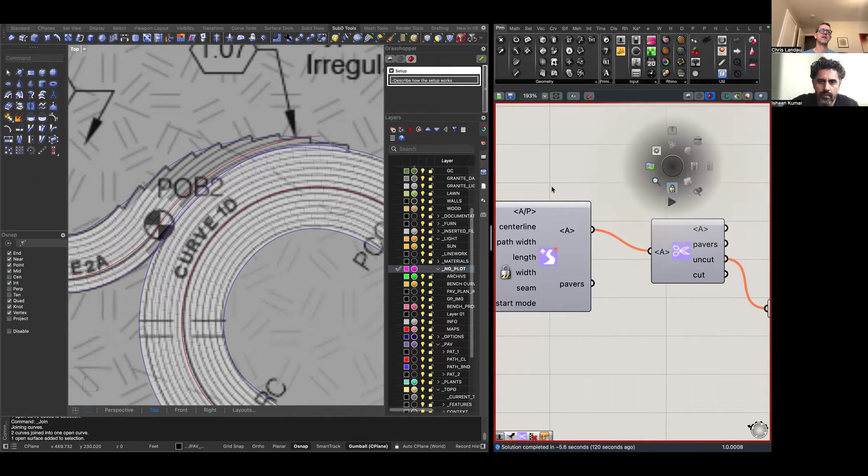Huh, that's weird. Anyway, I'm just trying to extend the curve is all. But if I select this curve and then this curve and I say join, and now we can unlock. We'll just also check to make sure they're on the right layer. But usually the last thing you select, if you say join, it'll join and it'll become part of that layer. And then here we can unlock this, and things are starting to look a lot closer.

And sometimes it's good enough for a rendering maybe, or it's good enough for a quick design study. But we can expand our scope here to make it so that we don't have missing teeth at least. And the neat thing about this is we can refine this into a construction document, right? Like we're just tweaking things and refining and saying, hey, how do I want this to work, or how does the boss want this to work? So we have that.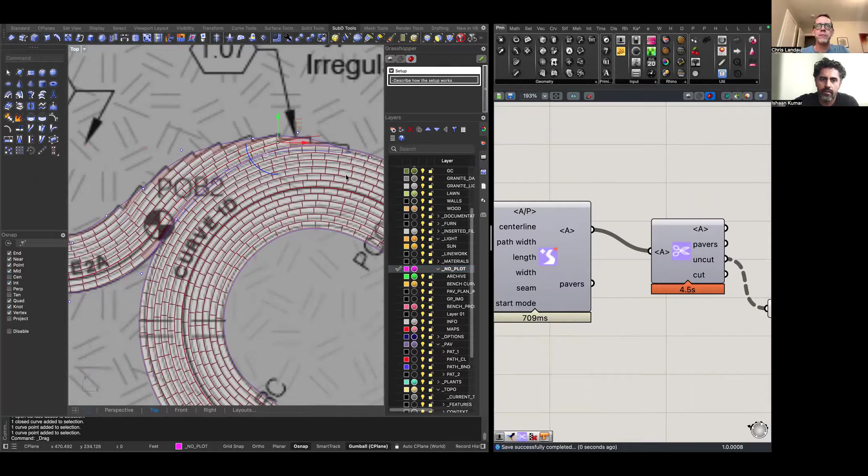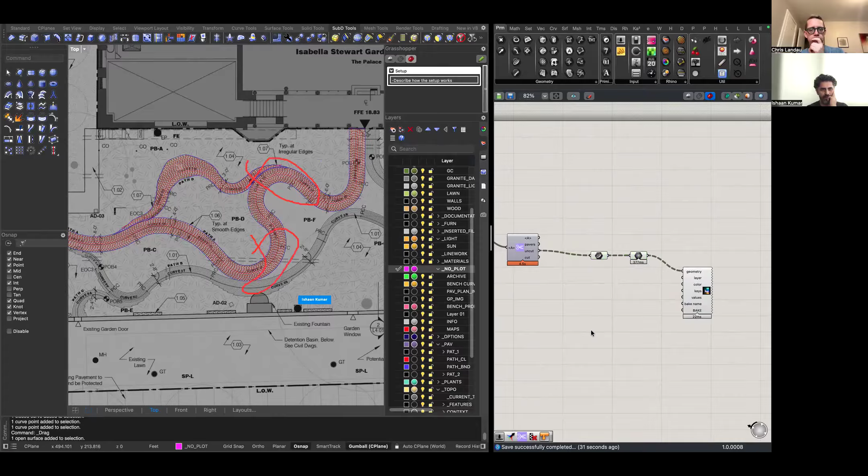So that's the pattern. And let's look very quickly at the colorways, right? So there's a few ways to do this. One is an image color rule, and another is an attractor color rule. There's a few different ways. You could bring a sketch and just have these blobs and it would start to populate based on your sketch. Yeah. Good idea.

What was the... they were using a tapestry, right? Yeah, as the basis. Let's do this. Let me grab this image and I'll pull this into here. This is a tapestry. Oops. Got a tapestry. I'll pull this tapestry into here. I want to make sure that it's not overriding another image, so that's why I need to put it here. And then I'll do like this. And then, it's like a tapestry, right?

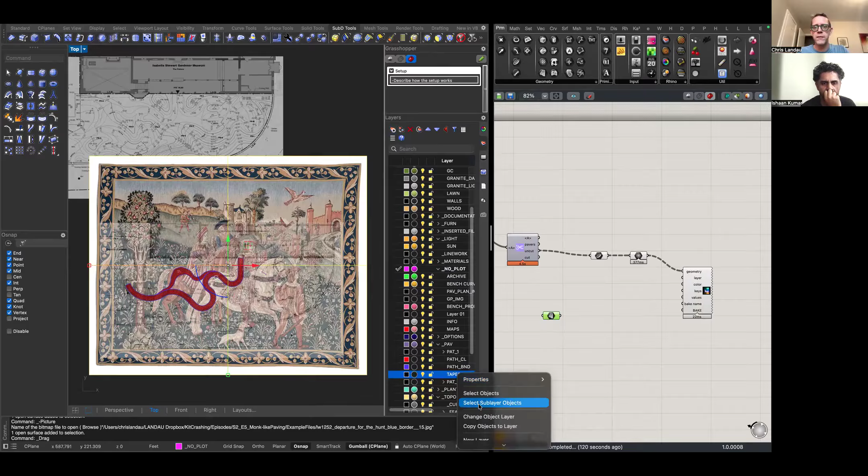We'll take that image. Well, let me reference it first. I'll say surface. Just going to right click and say set one surface. For individual geometries like this, I don't like to use the layer pipeline as often, but you can do that. In this case, I just want to reference that. And then I'm going to put it on its own layer. So we'll say tapestry image. We'll change this layer. We'll hide this. And then I don't want to see this either. Turn preview off.

So I'll say save. We have a few odd things here. Whenever the trim paver tool cuts out pavers, the area that continues forward is the exact trim, right? But we have this special output of cut and uncut pavers, and we're using this special case. So what we can do is take the area that we had before we filled it with pavers, and we can fill it with custom paving. So we'll take this set of pavers as a pattern, and then these areas.

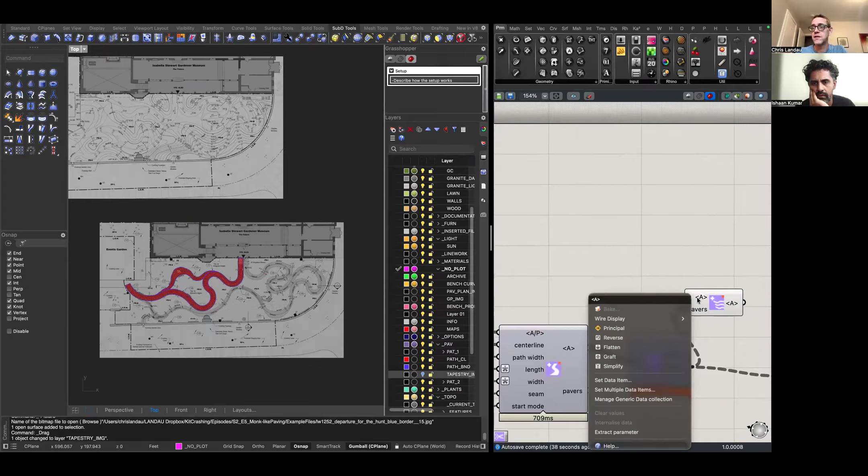One thing you can see though, see that dotted line? That dotted line is saying that there's two branches, basically. It means that there's multiple layers of data here. There's two layers because there are two areas. And so if I plug in the areas, I'm going to have these two things in one list versus all these things in these two lists. So what I really need is two branches for each set of data. So we'll branch this. We'll say graft so that when we plug the areas in, sorry, sometimes we get in this little click loop. When I click there, it now is going to apply these pavers to this area and these pavers to that area.

And then I can... What was this component, Chris? This last one, waves? Add custom pattern. And the neat thing about that is you can add any curved geometry as a pattern to your area, right? So that could be some crazy thing that you've created. We could even, like, I could do this, this is going to be insane, but let me see if I have a fillet.

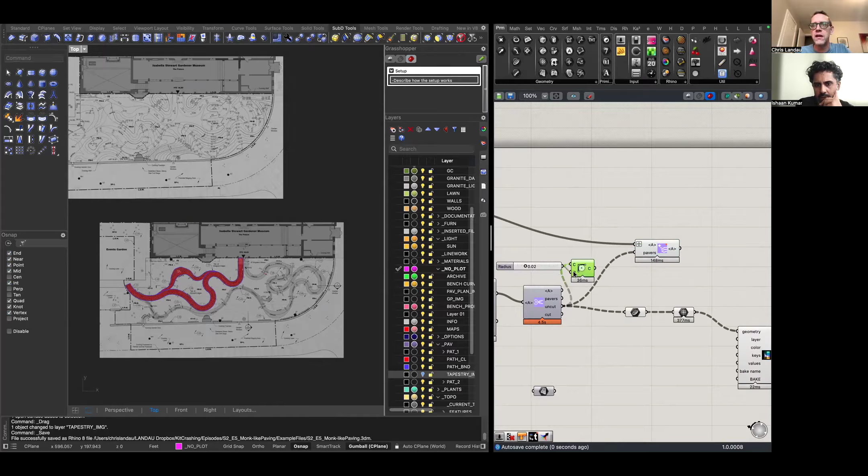And I do, this is probably going to explode my computer. I'll just say save everything. I'll plug these uncut pavers into here. I'll give them all radiuses, right? So now they have nice radiuses, and then I plug those into here. So now I have this really customized pattern, right? That maybe looks even more. And I'll plug these into here just so that we can see that reflected in our preview.

So that you can customize the pattern that goes in, and you can take our standardized patterns and pull out the pavers and do stuff with them, or you can create your own pattern using some Grasshopper thing. Now, once I have that, I'm going to create an image color rule.

An image color rule allows us to take this surface that has an image mapped to it, plug that into the picture, and then we're going to add a color rule to the area. So we say add this color rule. And now each of those areas has a color rule. And we're going to move this down because it's going to get replaced. We're going to say draw the area.

With that, we now have different options. So we can do colors. There's the type of thing we're outputting, the thickness, if we're doing pavers that actually have width. But I'm gonna just create a swatch that's white, copy and paste that, and change the other one to gray, just so that we can do our two colors. I'll create a merge component.

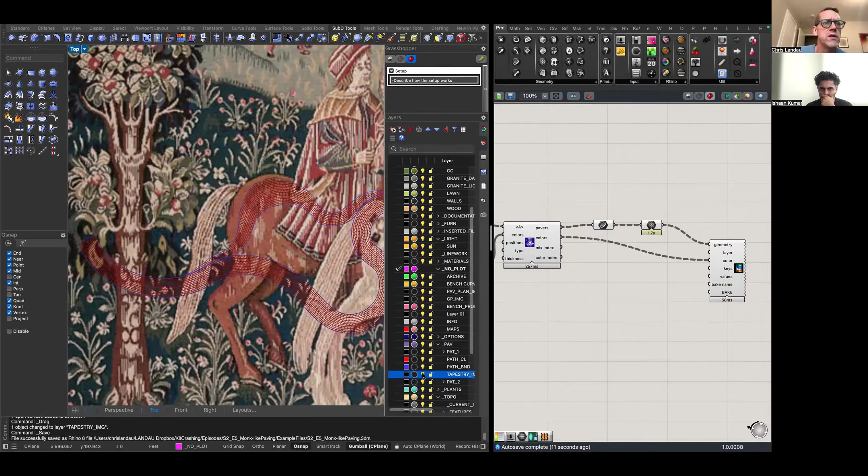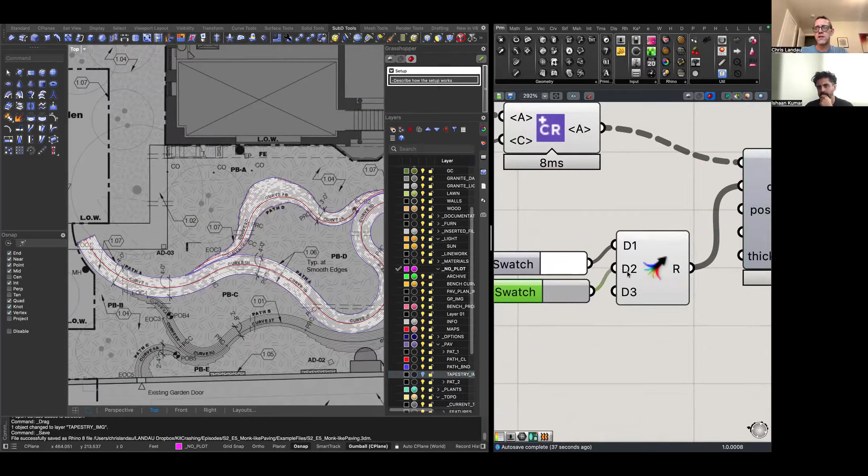And now we can see that this thing is following the tapestry image. Let me hide these first. So if I turn that on, I can see that it's actually turning the light areas into dark colors. And the reason that happens is because, if you think about it, a dark color is a lower number, right? And so what we actually want to do is move this dark gray to be the first color if we want it to reflect that image more clearly.

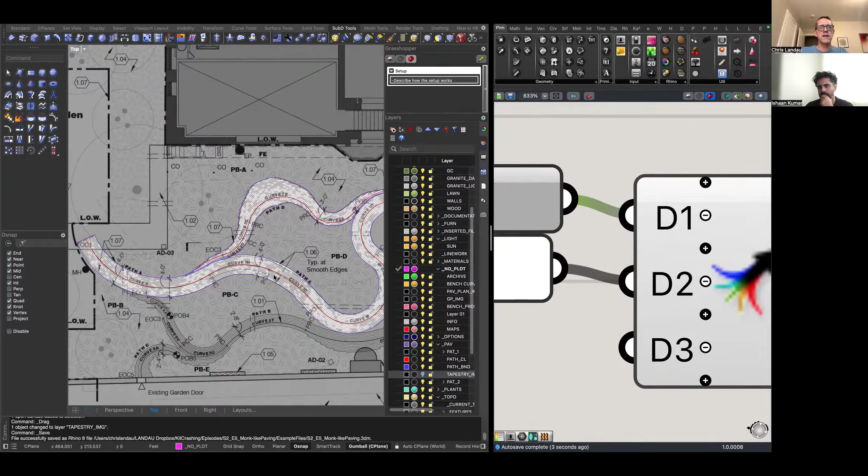Oops. I don't know what I just did. There we go. I plugged gray into the black. So now we can see that's the horse's leg there, or the horse's tail. That's the tree. Yeah, so it's not the most dramatic image. We might want an image that's more like spots. Let's do this one.

But here, let me send you this image. Oh yeah, do you have one? Yeah, their image, because I'm thinking about how they would have done this. Okay. Are you sending via email or? I'm just gonna take a screenshot because I don't know how to do this fast enough. Put it in the chat. Yeah, we'll cut this part out. It's all right. It's part of the fun. Zoom chat. How far are we in here?

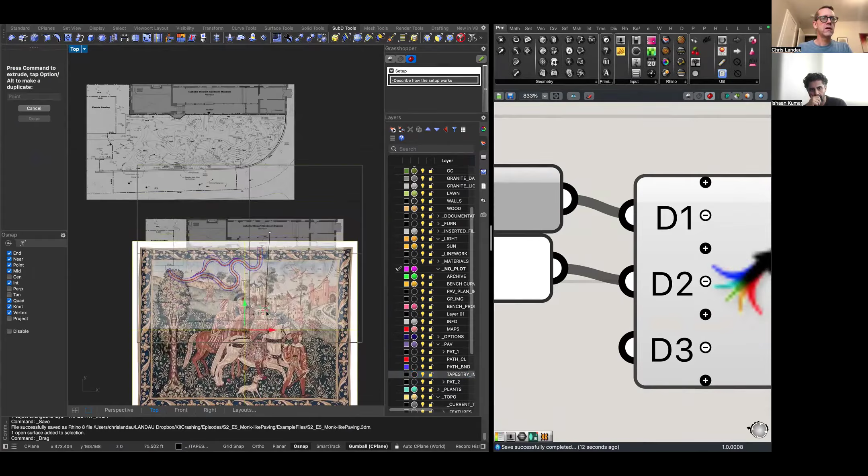Yeah. So I could say, all right, well, I just need an area of this image that's more interesting. So I can take this and bring it down here, and then say, scale this, like this, so that it's that pattern on the border. Yeah. And then turn this off. And now we can see that it has these bigger shapes, right?

Blotches, yeah. Yeah. And part of the reason that it's not like black and white is that that image isn't black and white. It's like all these weird in-between tones. And so if you use an image, you may want to adjust it to be more normalized to like black and white or whatever.

I've also found that if you really want to control super smooth gradients, you can use Illustrator to do really controlled gradients. You can do gradients that aren't just like a single offset. Yeah, you can create gradient fields and stuff. Deformed. I've seen some really neat results with that from some folks.

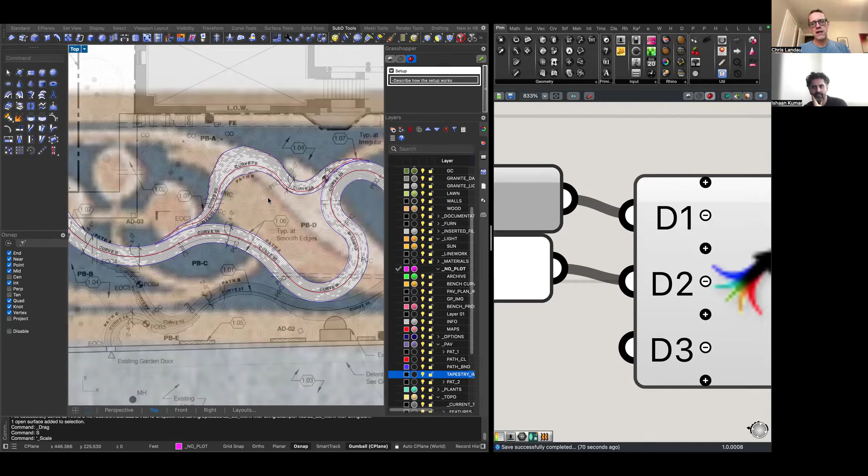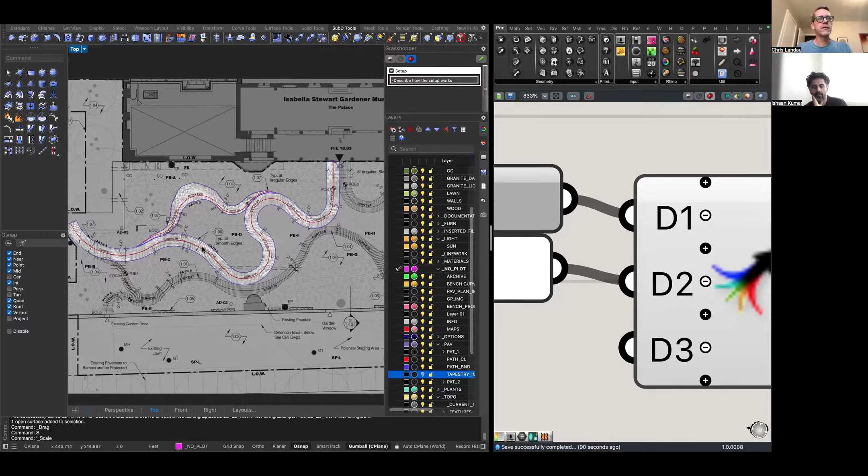So turn that off. And really all you have to do now is iterate and come up with ideas for drawing the rest of the shapes, having different pattern ideas, exploring a different wiggle to the thing or whatever. Yeah, but I'm trying to think if there are other rules, limiting. What's that? But the rules, and that's kind of what we're trying to really highlight here is that

I think the key word in kit crashing is process. We built in an hour a script that you can then iterate. We can now iterate the curve, we can iterate the boundary, we can iterate the paver size, we can iterate the gap. Absolutely. There's so much to be done here. It's really powerful and saved countless hours. It's nice to get under the hood, and I love that book because it really reveals the process and how much work.

But going back to the conversation we had at the beginning, this is a garden. There are very few gardens that firms are going to land with that kind of budget and time to explore those ideas. You have to get the project. Oh, the project, Renzo was building his building and the garden had to be ready and you're working against a timeline. Doing these studies, we would go down from the 16th floor in MVVA and go to the Cadman Plaza and mock up things real time. You've got to have the time and budget and a client that's willing to pay for that.

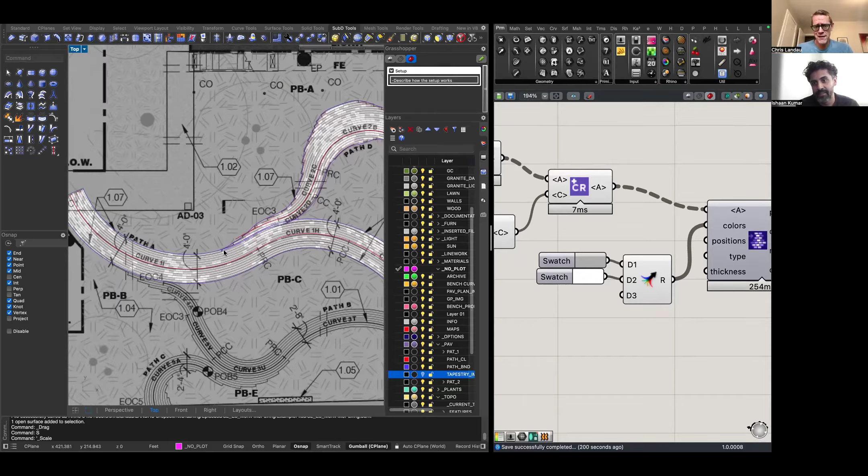Yeah. I think that this gives you, going back to the initial conversation, which is why I wanted to have that with you, of the digital versus the physical, a lot of pros in terms of budget and being profitable as a practice. Yeah. And what you want to achieve as a practice, because a lot of practices are starting on small projects and they want to show that they can do something great, but that just takes doing all this work that's free, and it's really hard. So we're hoping that we can elevate those firms and, in general, help to elevate the profession and the things that the profession can do with paving, with topo and performance and all those other fun things.

It started raining out here.

And change over time. Another session to be had. We've got to get into water soon. Yeah. We've got to talk water. Well, I really am curious about the grading on this one, because the topo and then serial sections across this thing, just having that handy.